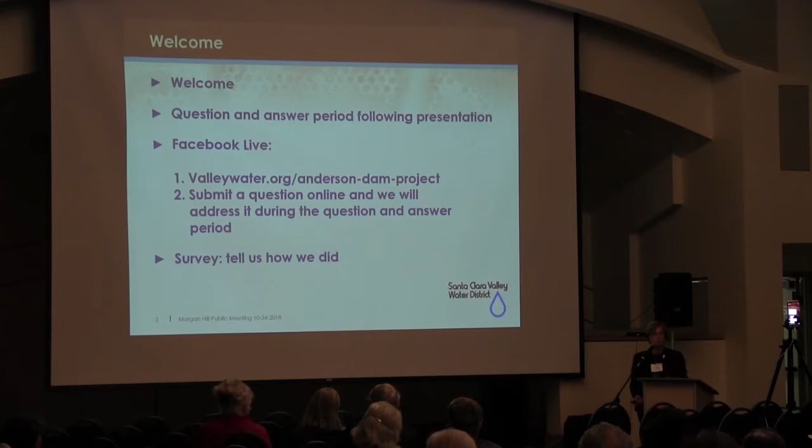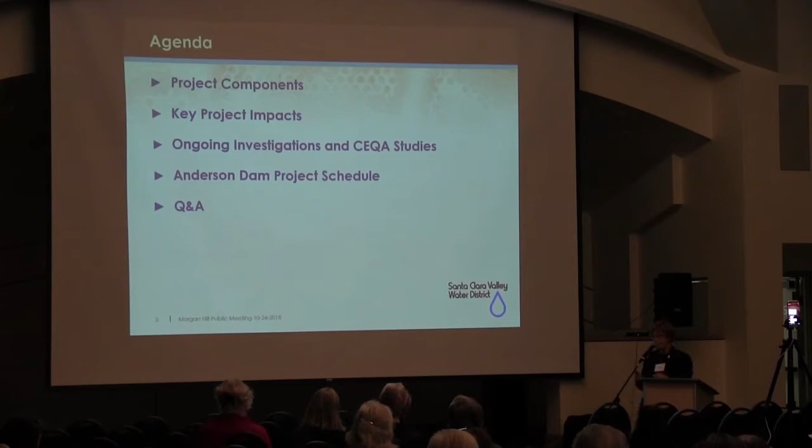With that, here's our agenda. We're going to briefly talk about the project components, spend some time on the project impacts, talk about what we're doing in terms of investigations. We're still doing a lot of data collection out there, and then briefly talk about the project schedule before we go into the Q&A. So I'll begin briefly with project components, which I'll actually hand over to Hemant Desai to go, but I have to do the first slide.

This is just an aerial view of the existing dam and Anderson Reservoir. The dam embankment is what you see looking from Morgan Hill. The spillway is up to the upper left. We have an outlet pipe about 5 feet in diameter that runs directly below the entire dam and discharges to Coyote Creek. The dam crest is that road that people can currently drive or walk across. And then, of course, our parking lot up there next to the Anderson Lake Recreation Area.

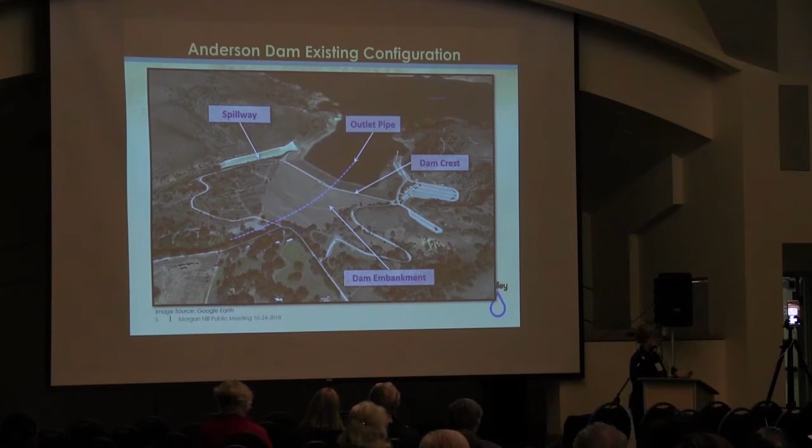The project was conceived because studies around 2008 found that the existing embankment, the existing dam, has a foundation with a potential for liquefaction. Thereafterwards, through investigation, we also found that there are a number of faults which basically crisscross the site, and they can have some adverse impact on the dam itself.

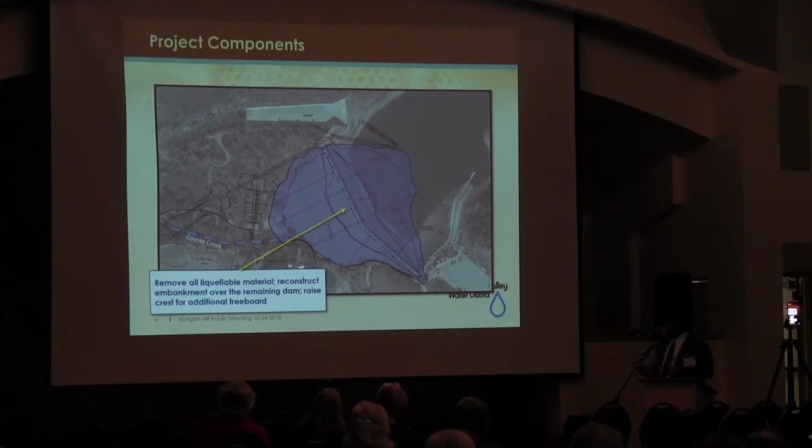So in order to address that, what we are planning to do is basically remove most of the existing embankment, remove the liquefiable soil which is the foundation of the dam, and then replace this with a better, stronger dam which can resist maximum credible earthquakes. What you see in blue is the footprint of the retrofit, which is basically removing most of the dam and then rebuilding it.

In addition, if you remember in 2017 when there were problems with Oroville spillway, the governor issued an order asking all dam owners to reevaluate their spillways. So the district reevaluated the spillway, and found that even though in its current configuration the spillway is safe, it needs to be brought up to new standards. So this project will be addressing that, replacing most of the spillway and bringing it to current standards.

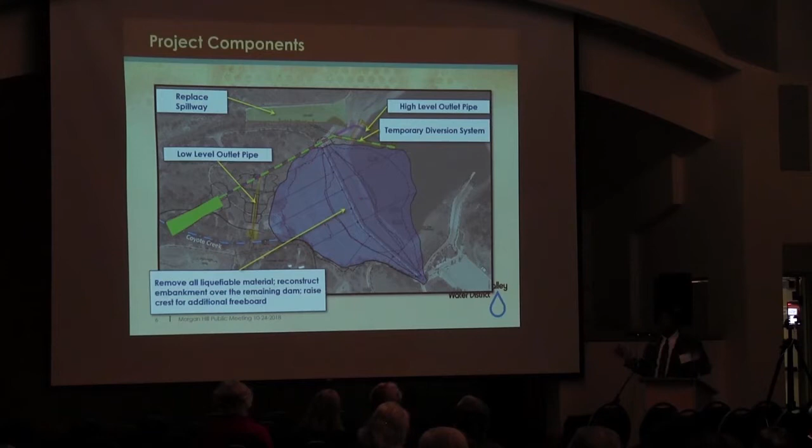What you see in the dashed orange, purple, and green is the diversion structure, and I'll brief you more on its importance when I go through the construction sequence. It is basically there for construction, to keep the reservoir drained through the 2 years of construction.

So here's the construction sequence. The construction is planned for 5 years, out of which 2 years, year 3 and year 4, we plan to keep the reservoir drained so that we can construct the retrofitted embankment. In year 1 and year 2, we will build the diversion structure, as shown right here.

At the end of year 3, in spring, we will have the dam with a diversion structure and we'll start dewatering the reservoir. The dam here is at elevation 647, the current elevation. In year 3, during summer, we will excavate the existing embankment to this configuration and bring it down to an elevation of 570, lower than 647.

We'll winterize it over winter of year 3, and then in summer of year 4, April to June, we'll come and excavate it all the way up to the core, which is what we'll leave in place from the existing dam, then rebuild it that same year by October to 570. The importance of 570 is that it gives us the protection we need, 1 in 2,000, during the 2 winters where we keep the reservoir completely drained but have a lower dam.

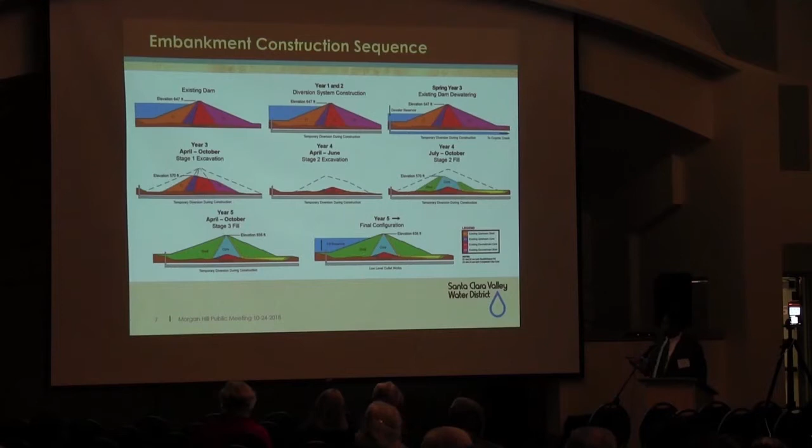Then in year 5, we'll come in summer and build it back to 656 elevation, and allow it to fill in year 5. So that's the construction sequence.

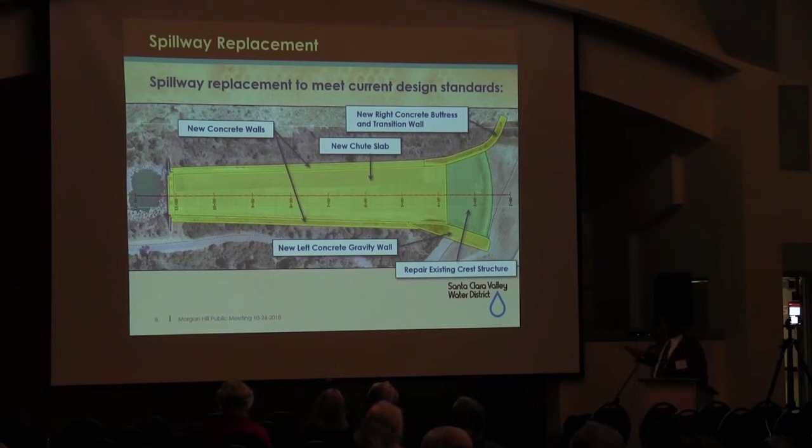I spoke about the Oroville incident and what it led to. Basically we'll be replacing the spillway walls, the chute. There'll be a new chute provided with proper under-drainage anchors so that we don't get anything like Oroville. What will be left in place is this green part.

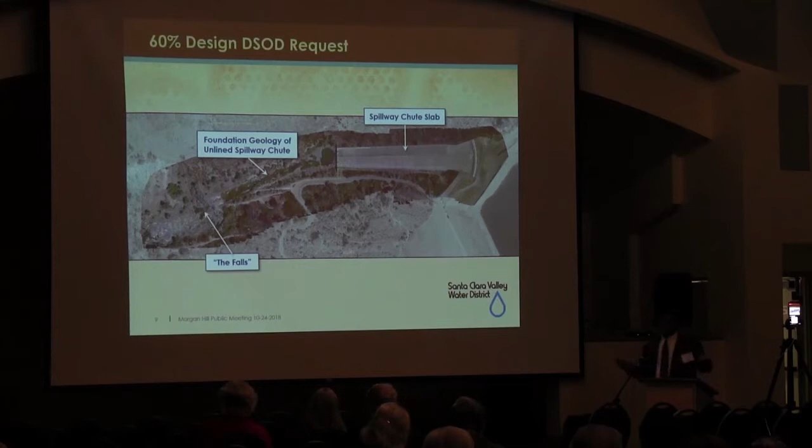We continue to evaluate the spillway. This is the existing concrete spillway, and thereafter there is an unlined portion of the spillway which the district is still evaluating. DSOD at the 60% design asked us to do some more studies here, mostly related to the foundation geology. They want to be sure that the unlined portion of the spillway is on competent rock. So that's what we'll be evaluating this winter.

As Simone pointed out, one of the things we're going to be doing is that the outlet structures are much larger than the current one, which now can release about 450 cubic feet per second of water, CFS. The issue is that as this outlet gets bigger, because DSOD has required that the reservoir be able to be dewatered in a relatively short period of time in case of an emergency, the amount of water being released now is considerably greater.

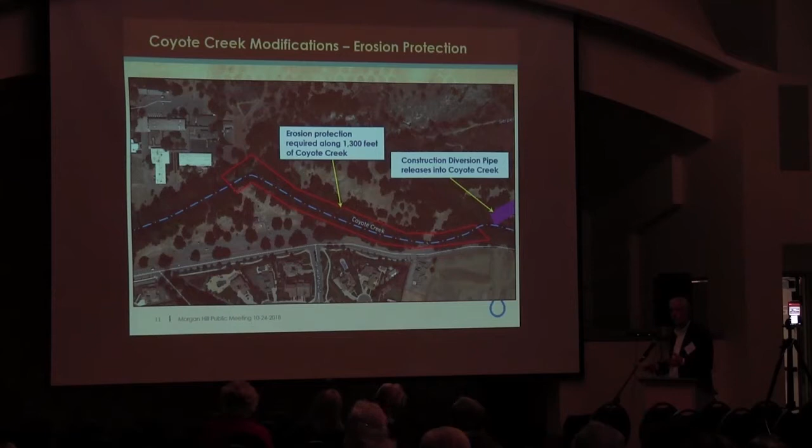So one of the things being looked at by the design team is how the creek has a certain amount of erosiveness, and there are some issues with that from a flooding perspective and the amount of the walls being washed away, such that it will need to be armored if we stuck with this design.

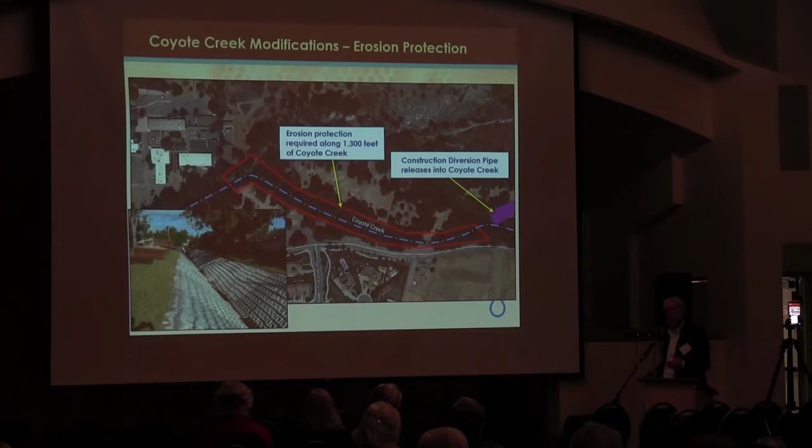As part of that work, we're looking at alternatives to this, and we don't know just yet exactly what those might be, but some could result in reopening the channel where the spillway comes out, what we call the north channel, and putting more water in that, leaving this to take the current level of water it can take, which is 450 CFS. We don't know if that's feasible yet, but it's being evaluated so we can lessen the level of effects we're having on the ecosystem.

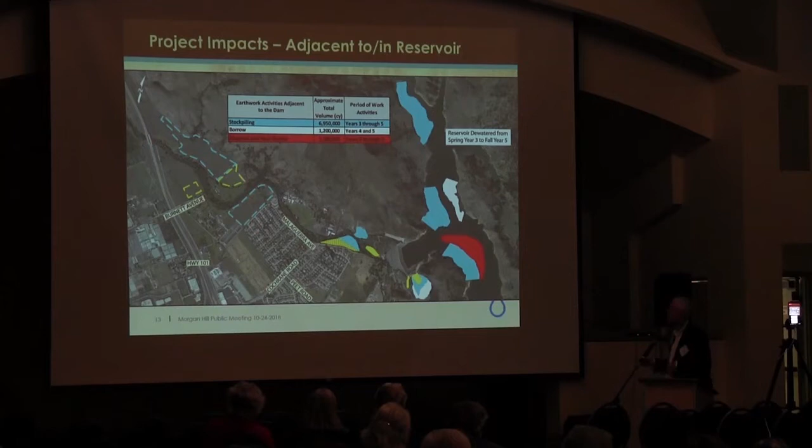To give you an idea, there's over 9 million cubic yards of material being moved in the dam itself, from the dam in these areas. That's a fair amount of material, and most of that is in the reservoir, so the purpose of that is to minimize air quality, noise, and traffic impacts within the neighborhood. The imported materials I talked about are only about 250,000 cubic yards, which represents less than 3% of the amount of material being moved around in the reservoir. That goes to show you that's a relatively small amount.

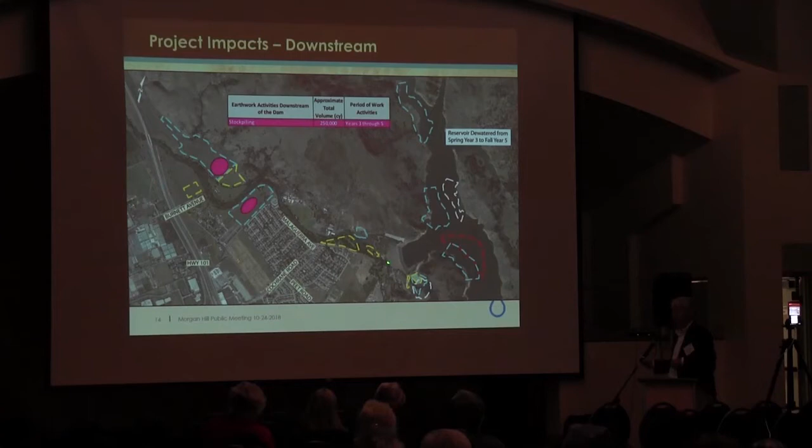There's an equal amount of filter material that will be brought in directly to the dam, and we'll show you those travel routes in a second.

This represents how the imported materials will be brought in off of 101 down Monterey Highway and on Burnett Avenue, and then stockpiled on the site.

Then an equal amount of material, another 250,000 cubic yards of this filter material, will be brought in off of 101 via Cochrane Road, directly to the embankment. So those are the two areas of travel for this imported material.

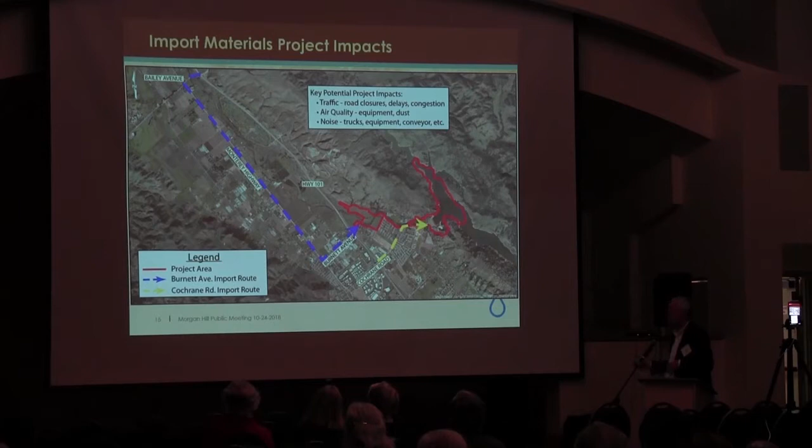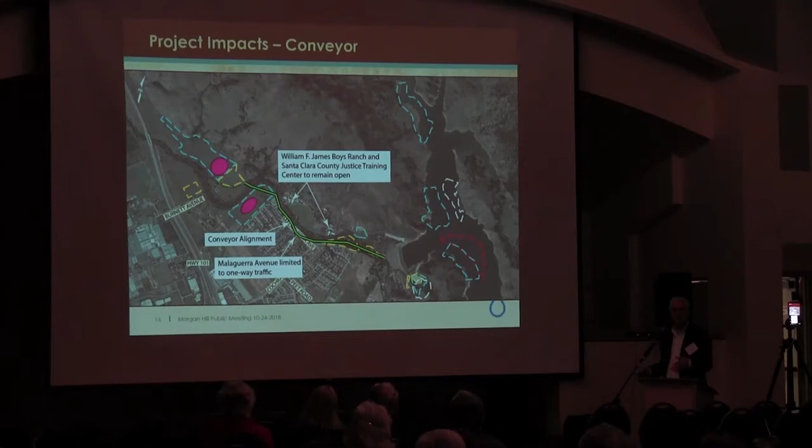We also are building a conveyor system, trying to minimize truck traffic by the neighborhood. The conveyor system will run along Malaguerra, taking about half of the lane, and that will be used for moving materials from these stockpile areas over to the embankment. Again, this isn't the most efficient way to move dirt, but it's one of the ways we've come up with to minimize the effects on the neighborhoods.

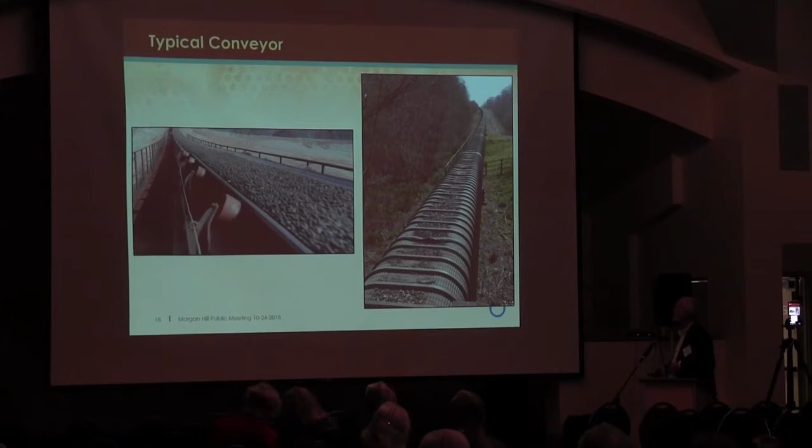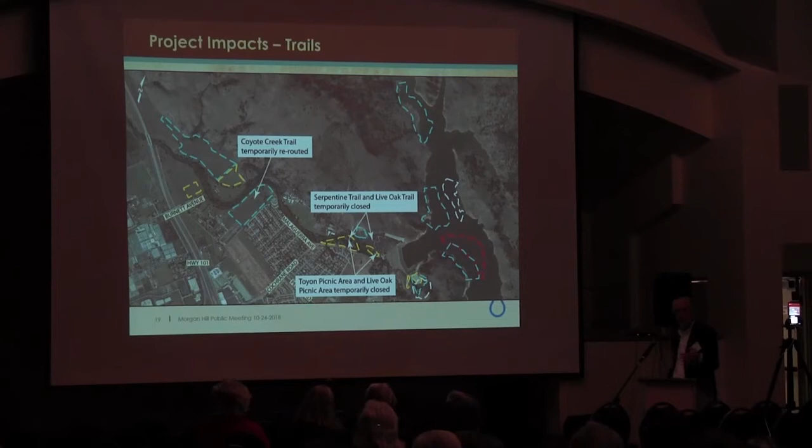This work will also affect some of the recreational activities around the reservoir because, from a safety perspective, they'll have to be closed. The Toyon Picnic and Live Oak Picnic areas will be closed. The Serpentine Trail and Live Oak Trails will be temporarily closed during construction, and the Coyote Creek Trail will be temporarily rerouted, because we have to keep people away from the construction traffic. It's a safety issue.

During the entire 5 years of construction, this portion of Cochrane Road will be closed. Local traffic can get through, but it's generally going to be closed to non-local traffic during the 5 years of construction.

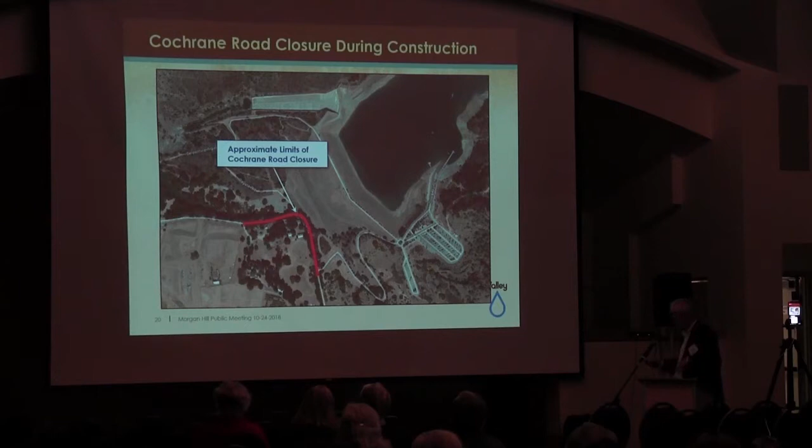The current road that goes across the dam and down the other side is going to be permanently closed, while pedestrian traffic will be allowed to walk on it once constructed and reopened. You will no longer be able to drive over the dam and down.

The way it's being solved is the road up to the parking area is going to be 2 lanes now, so the traffic will come in and out of that entrance area. This portion of Cochrane Road will be removed, and there will be some rerouting, to be determined, of pedestrian traffic down and around over here somewhere. We'll also expand the parking lot beyond what it currently is.

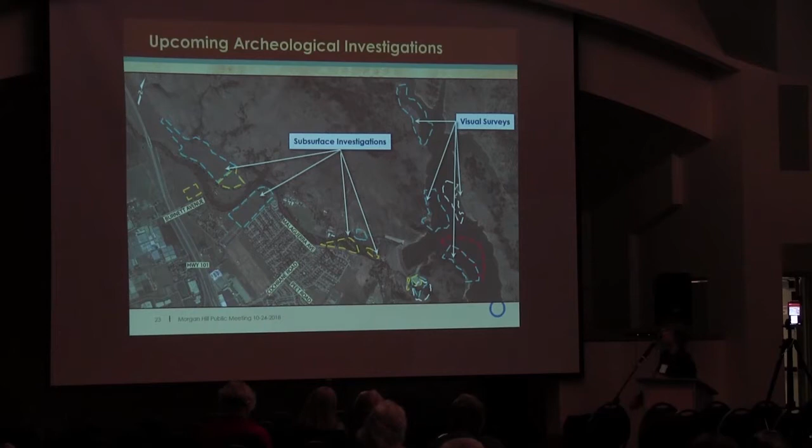And despite the fact that we've done almost four years of geotechnical and geological investigations, when we submitted the 60% design, the stages of design of a project are usually 30, 60, 90%, and then final. At each of those stages, our regulators, the Division of Safety of Dams, and the Federal Energy Regulatory Commission have to review those plans, comment on them, and provide us with direction or requests for more information.

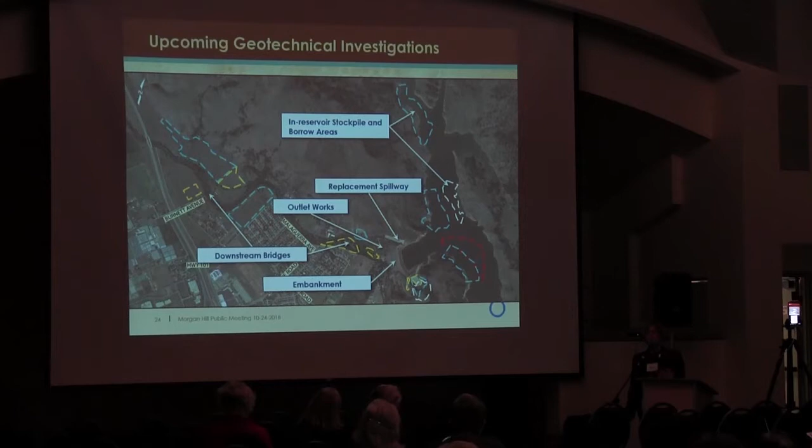So right now, we are in the process of looking at more geotechnical investigations for the new outlet works, a few more on the embankment, downstream bridges, the replacement of the spillway. We want to find out what is that geology underneath the existing spillway, and then also make sure that the stockpile areas and the borrow areas are going to withstand the activities that will be taking place.

Also, because fish habitat is a very important feature of Coyote Creek, and because National Marine Fisheries Service and U.S. Fish and Wildlife are going to be very keen on our impacts to fisheries, we are going to be doing fish assessments, habitat assessments, and also, let me move to the landslides in a minute, but we're going to be doing some surveys of creeks that flow into Anderson Reservoir.

Also one of the major creeks, Upper Coyote Creek, that flows into Coyote, and then the downstream portions of Coyote Creek below the dam. We have to collect habitat area as well as fishery studies and the like.

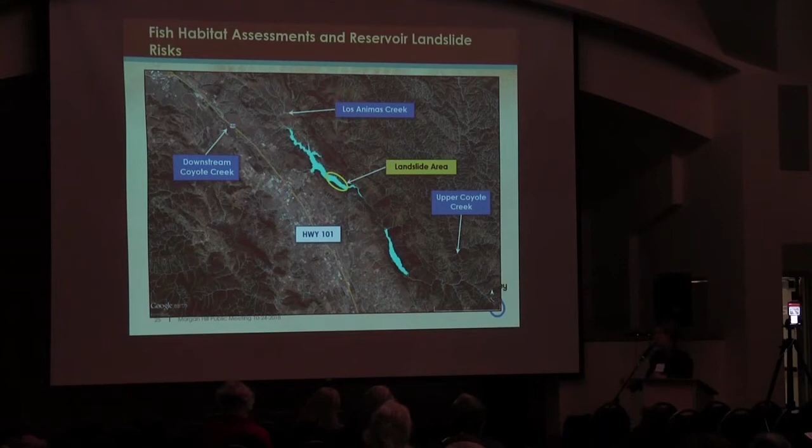And then also, on both the east and the west ends of Anderson Reservoir, on its southern end, there is a potential for landslides to occur. They have occurred ever since the reservoir was built. There are areas of unstable soil, and the complete drawdown of the reservoir may have some impacts in that area. So we will be doing pre-construction surveys and then also monitoring the areas carefully during construction.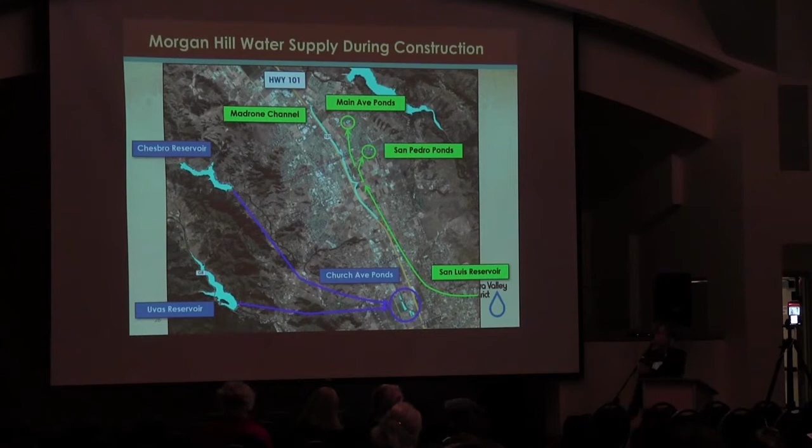So when Anderson is dewatered, Church Avenue ponds will be fed, as they are now, by Chesbro and Uvas reservoirs. The ponds and the Madrone Channel in the north will get their water supply from the San Luis Reservoir, over on the Pacheco Pass, Highway 152. We have a large pipe that comes in through the Pacheco tunnel, runs up along 101, and that will provide imported water to maintain groundwater recharge for those years.

So here is our current schedule for the project. It's moved a little bit, primarily because of the outcome of the 60% design. We received requests from DSOD and from FERC in July of this year asking us to investigate this further and provide more data. So we are continuing with design, and we'll probably be done by 2020.

Our CEQA process, the Environmental Impact Report, has moved slightly. We had originally anticipated releasing the draft EIR this fall, but we'll probably come out with that in June or July of next year. The key reason is that this additional data we're collecting now has to be incorporated into the draft environmental impact report. Otherwise it will be considered unfinished, and it's better to put it all together now rather than be delayed and have to rewrite it later.

With the final EIR in early 2020, then the National Environmental Policy Act, known as NEPA, we have to do a federal document as well, which will somewhat follow and lag behind the CEQA work. And then, of course, the permitting—we're engaging with the regulatory agencies now, but they will also want to read the environmental documents we prepare, and we'll only be able to finalize those permit agreements after the final EIR is certified. So, again, I'll leave the caveat that we're planning to get the permits by 2021, but there's no guarantee of that. That's a process we can do our best to manage, but we cannot control.

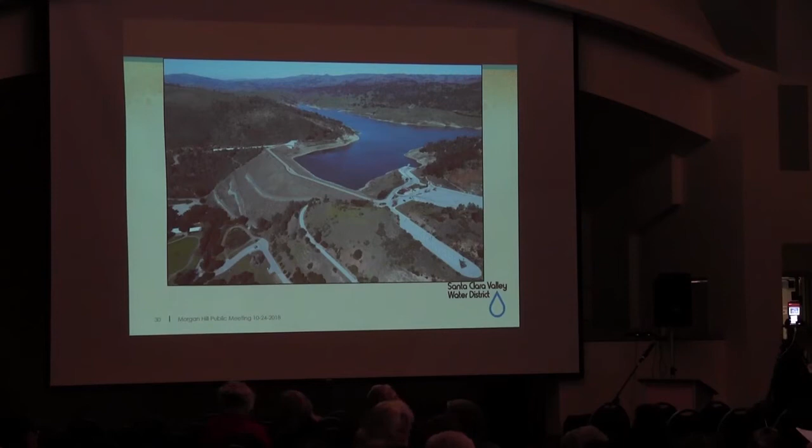I'm unit manager of our water resources policy and planning unit. We've been working on the project planning since last year. We initially looked at doing any kind of fast action we could take to reduce the risk of flooding for the community and the urban area. We were able to do one project in the Rock Springs community to reduce the risk of flooding there, and also started looking at the entire flood problem in the urbanized area.

So that project is going on. We'll be going through the planning process and developing alternatives over the next year. First order of business is defining the problem and getting back to the community. We're preparing for a public meeting around December or perhaps January, depending on the holiday timeline, to come back to the community and let you know what the plan is over the short term and long term.

At the same time, we're also starting the Corps of Engineers feasibility study. The Corps has not been interested in studying the problem themselves, but we will do the study with their assistance and pay for it, so that we can potentially develop some federal funding for the flood protection project, if that works. So it'll be a two-track planning study, district planning and Corps of Engineers planning.

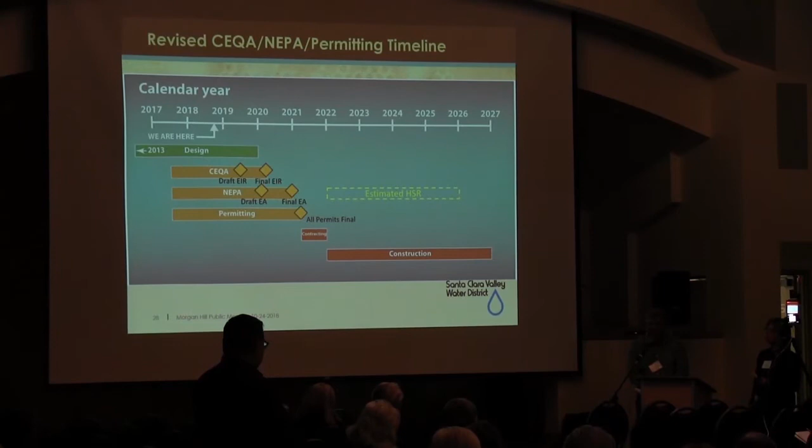In terms of the specific flood protection project, as I described, we're in the planning phase. We're going to be coming to the community soon with our initial concepts of what we have in mind for the flood protection project. That's over the next 2 or 3 months. But Catherine's going to address the reservoir.

So in response to your question, when are we going to get a pump system in place? Part of this construction, as we explained, one of the project components is to build a new outlet pipe, not one that goes under the dam, but around it. If you're looking downstream, it's going to go through the right abutment, through the hill right there, and then come out in Coyote Creek. That pipe will be bigger than the pipe currently in place. So the district will have the capability of releasing more water to the creek in the event of back-to-back storms.

If you recall, in 2017, we opened up our outlet pipe very, very early in January. When the first big rainstorm came, the first weekend of January, that Monday, we made a decision to open that pipe to start releasing 425 cubic feet per second. That pipe remained open all the way through, actually until almost mid-April, so that we could drain the reservoir to the best extent possible. As it turned out, it wasn't enough, right? And that has happened a number of times in the last 70 years that the dam has been there.

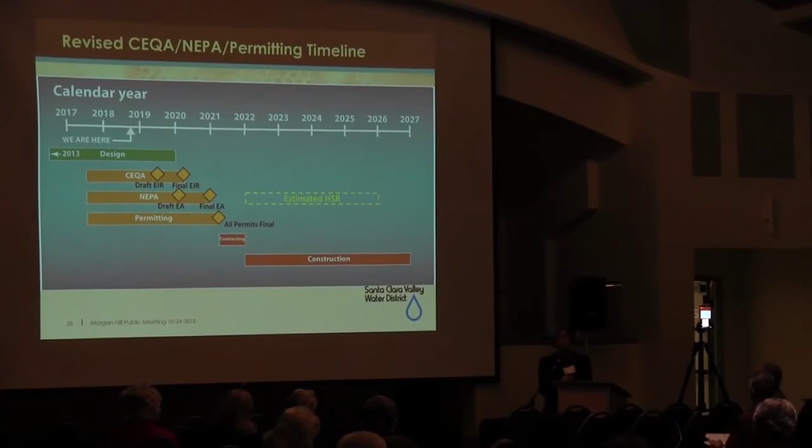So last winter, staff did have a discussion with the board of directors about potentially lowering the reservoir even lower than what we would normally do at the beginning of the winter season, primarily for the purpose of staying below that seismic restriction. Back in 2017, when it rained so hard, we did exceed that seismic restriction, and that caused a lot of anxiety in many communities, no question about that. So the board decided to lower the reservoir even further last December so as to make sure that even if it rained a lot, we would be a lot closer to that seismic restriction. We can only keep it about 55% full at all times, 55% or below.

So we lowered it even farther in case it rained. Well, it was a fairly, we would say, barely normal to dry winter in this area, and the reservoir never really gained a lot of volume.

In fact, in the spring, we had to take water from San Luis Reservoir and add it to Anderson so we would have enough of a cold water pool to release down Coyote Creek through the summer months to support the fish habitat that's there all the way down to the bay. So we had to actually supplement the amount that had run off from the watershed from the storms.

November 20th, next month, is going to be another board meeting, and during that meeting staff will be presenting a winter preparedness program for the board to understand what measures we're taking. There will be a discussion with the board about whether to lower the reservoir to the same extent as last year in advance of the winter rains. So that is going to be debated. It might be the same level as last year, or it may be different. That's going to be a staff discussion with the board.

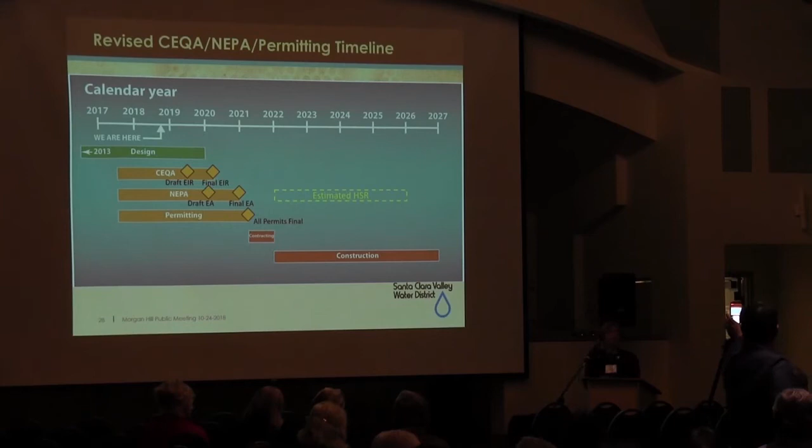Okay, I have a question here. As you mentioned, there have been many floods over the last several decades, and after each flood there have been promises made that we're going to fix it, and it hasn't been fixed. Why should we have confidence now that this is going to work? Secondly, how are we going to pay for this? I haven't heard anything about that, and that's always been a problem in the past. And third, when the dam is down and we get heavy rains, as we're likely to, is that going to mean greater threat of flood or less threat of flood?

Those are excellent questions. The board is constantly asking those same questions as you are. Listen, what I said earlier, we're all about flood protection. We're doing the best we can. I'm not going to give you any better hyperbole and say we're on it. We're doing the best we can to find the funding mechanisms, to get the federal government to release funding, to get the permitting process moving.

No, we want a long-term fix. We want a solution, not just for the 25-year, 50-year, or 100-year flood, but there are also projections for the 500-year flood. So we're looking out and acting as visionaries, asking what do we need to do, how do we access the resources to do this. Do we put it all on the ratepayers? Do the federal government involve themselves with the resources they have? So we're all in it together. I'm just sharing that with you. We're in this fight with you to win.

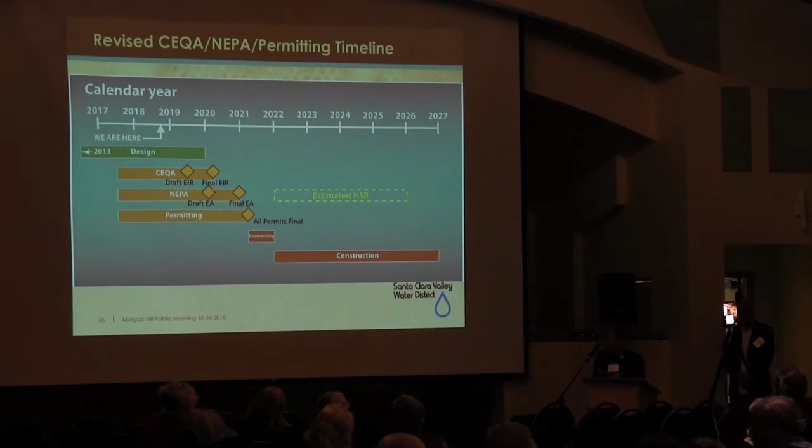And we didn't show the rerouting, let me see if I can quickly bring that up. Down at the end of Malaguerra, where you've got your access to the Coyote Creek Trail, we're going to reroute that so people can use it throughout the project construction. It'll be rerouted so it's safe from the activity around those stockpile areas.

Question over here from this gentleman. Yeah, if you could go back to your schedule chart, I have a couple of questions on that.

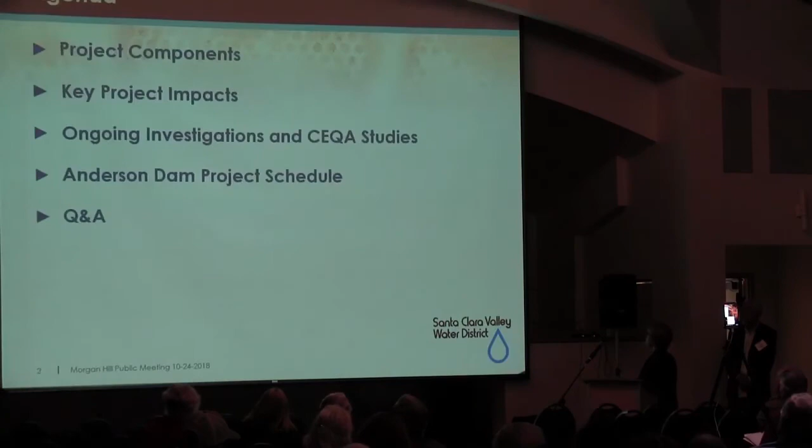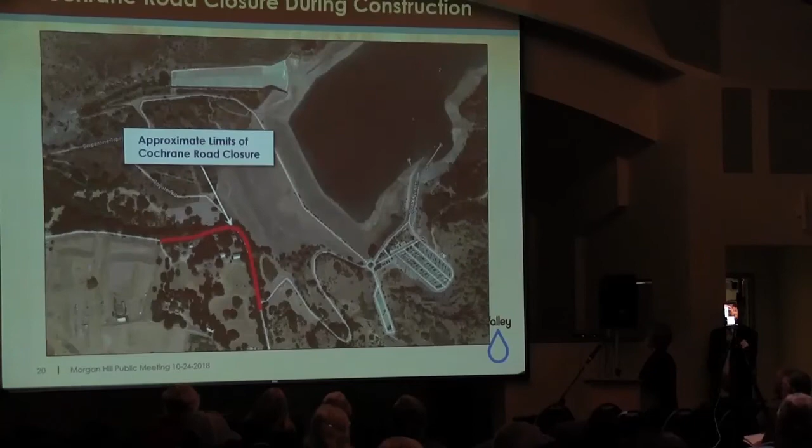You show on that chart that for NEPA, you're only preparing an environmental assessment rather than an environmental impact statement. What guarantee do you have that you won't have to prepare a NEPA environmental impact statement that will add years to your schedule before you even think of constructing?

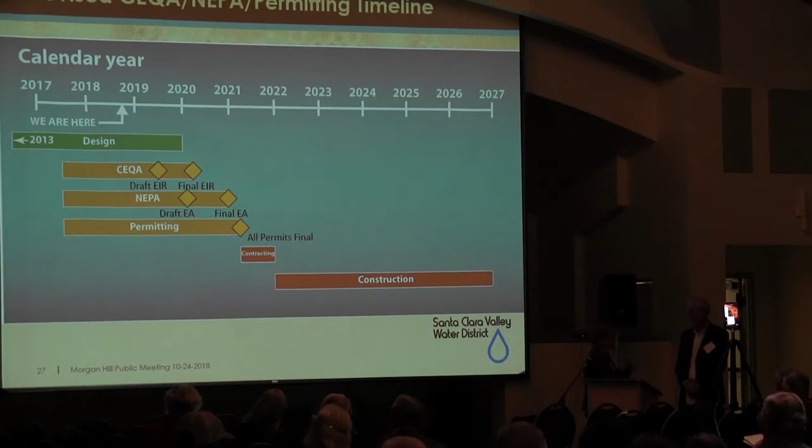It's a good question. We have two federal agencies working on this project in that regard, FERC D2SI and the U.S. Army Corps of Engineers, and FERC D2SI is taking the federal lead. From their experience, they believe an EA is adequate for this situation. To highlight that, the Calaveras Reservoir dam retrofit project did an EA, and that was considered appropriate and suitable. So while there's no guarantee, we do have some expectation based on past and current understanding from federal regulators that an EA is appropriate in this case.

I hope you're right, because we've worked on numerous projects where an environmental assessment would have been more than adequate, but we were still forced to do an EIS. So I hope you're right.

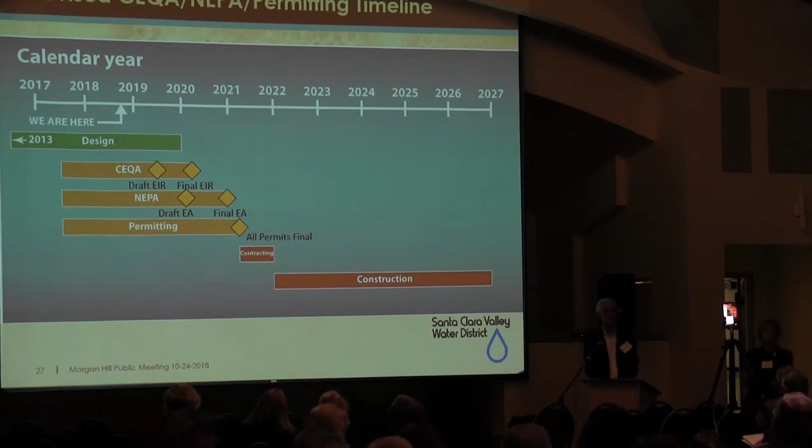The second question relates to high-speed rail, which used to be on this slide but has mysteriously disappeared. High-speed rail does not have an alignment yet—they're still trying to figure out their preferred alignment and how it would be built. Regardless, it seems there will be significant cumulative impacts between your project and the high-speed rail project along Monterey Road north of Morgan Hill, because of their construction activity and traffic, combined with the traffic you've shown coming down and over Burnett to your project site.

Well, that's why we posed the question to the High-Speed Rail Authority. They gave us information on their expectation for doing construction within the Santa Clara Valley, and that will be one of the key things we look at as one of the reasonably foreseeable projects for a cumulative analysis. So yes, you're right, that will be analyzed.

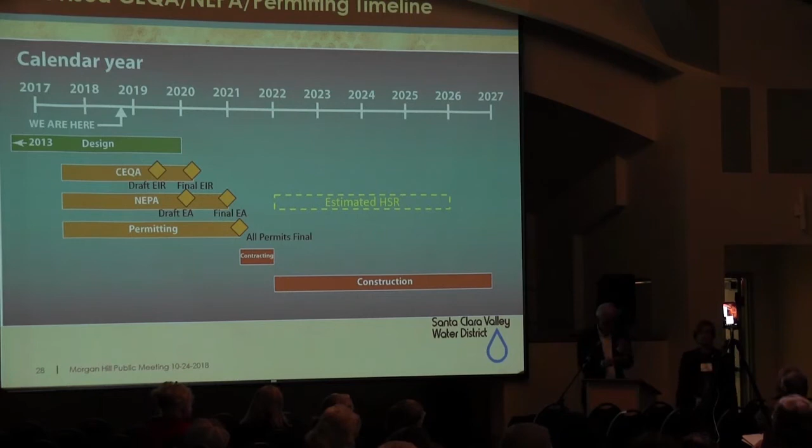Okay, I have a question back here. Let me answer one of these Facebook questions: will the lake reopen for recreational use prior to draining the lake?

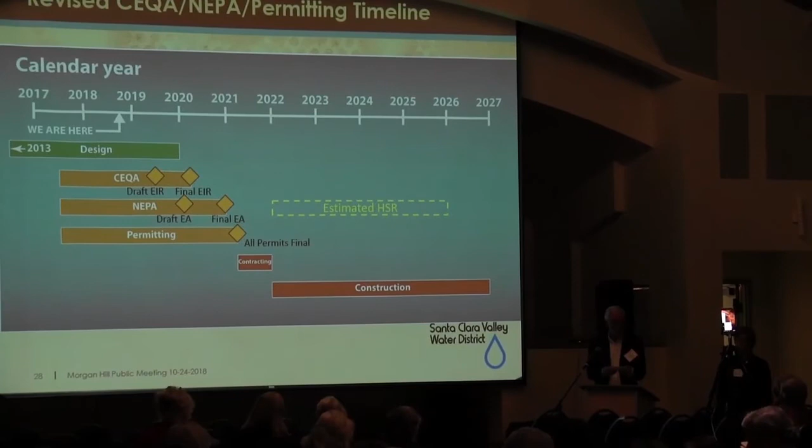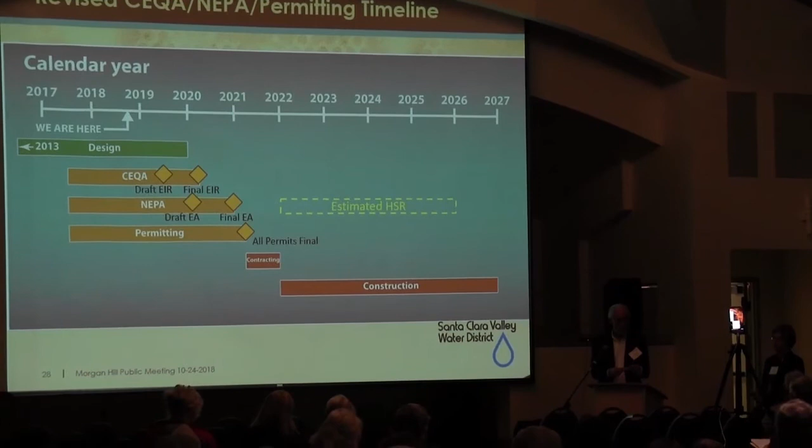There are two ways to look at that question: between now and when construction starts, which is really dependent upon how the board chooses to manage the reservoir levels. The second part is once we start drilling for the diversion structure—no, the lake will be closed for all recreational use at that point. So it depends on how you interpret the question. That's how we answer it.

So potentially 10 years if we close? Well, I can't speak to between now and when construction begins, but I can speak to when construction starts: recreational use will not be occurring in the reservoir during that 5 years, yes. Between now and then, it's dependent upon how the board wants to manage things, and Mother Nature.

There's another question, which I'll try to paraphrase, about potential landslides and how that may affect neighborhoods, given some indication there's already been some movement with the reservoir at a lower level over the last several years. As indicated, there's a monitoring program that will go into place during construction and reservoir dewatering, monitoring around the reservoir to see where there are movements. During construction, when those landslides are detected, there'll certainly be a strategy to go in and fix them where appropriate.

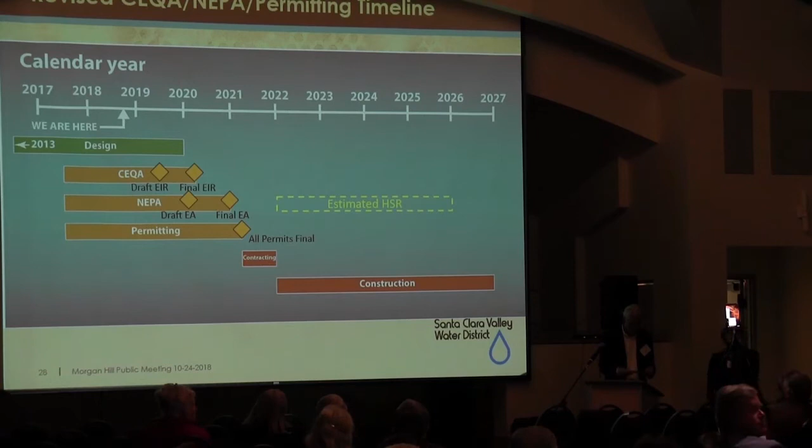So, okay, any other questions? We'll go right back here. Thank you. My name is Doug Mayer, I live in Morgan Hill. My question is, how much reservoir capacity are we giving up because you're going to use it as a site for disposal of material as well?

It's a good question, and certainly others have asked that. It turns out to be an extremely small percentage of the reservoir bottom. What you're seeing there is just a very small snapshot of the reservoir. We've calculated it to be just a couple percent of the reservoir bottom, and it's only going up a few feet, all told, because it's being compacted in. So there's almost no measurable change to reservoir capacity from that disposal.

Question over here. Yes, John Bailey. Okay, yes, good.

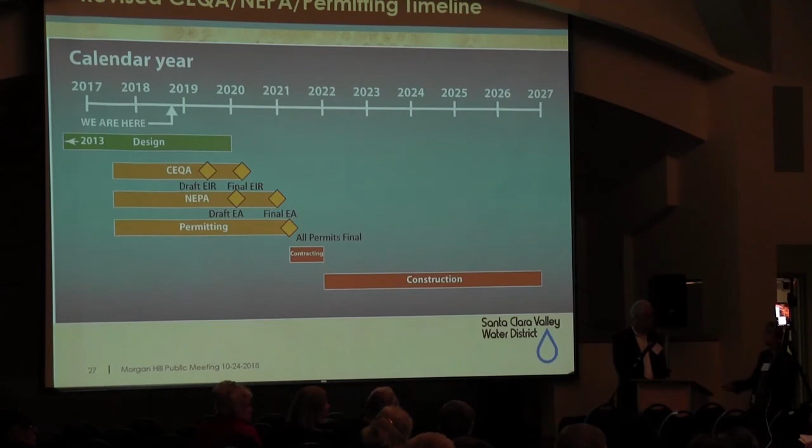Asking a domestic question about your plans. Are they yet in place to the extent that you know where the staging of equipment places will be? I ask because our house is opposite the staging areas for the Half Road project now, and that's like having a war zone all day, every day except weekends. It's really important to know this for the value of the property and everything else. Where will the staging areas be?

These two areas will be staging areas, and there may be a couple other small places as the plan is finalized and moves forward. We're trying to do those in ways that don't affect the neighborhood, but they also have to be in locations appropriate and suitable for the construction process. So we've got two competing ideas to try and optimize.

Tell me again what those areas are. I can't recognize them, pardon me? What roads are they? I don't understand this map too well. You pointed to two places, and I don't know where the roads are.

All right, so this is Highway 101. Burnett Avenue Bridge. The bridge that crosses the creek here was washed out about 20 years ago, so that bridge is not there. We're going to rebuild it as part of this project. But right now this is just a gravel-based parking area, so that's going to be one staging area.

And then Malaguerra Avenue ends at the ranger station, so we're going to also be using this area here. It's across the creek, so it's quite a distance away from any of these neighborhoods. But I do want to point out, this is another staging area here.

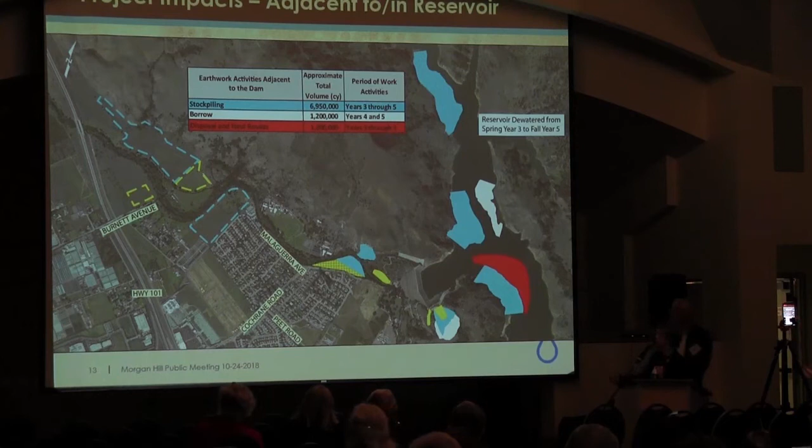This is Cochrane Road, coming off of 101 and then making that right turn and coming up to the dam embankment. So we'll be staging equipment here, over here too, and then the contractor will probably be parking equipment up at the parking lot area. So the staging areas closest to neighborhoods are right here on this approach up to Anderson Dam.

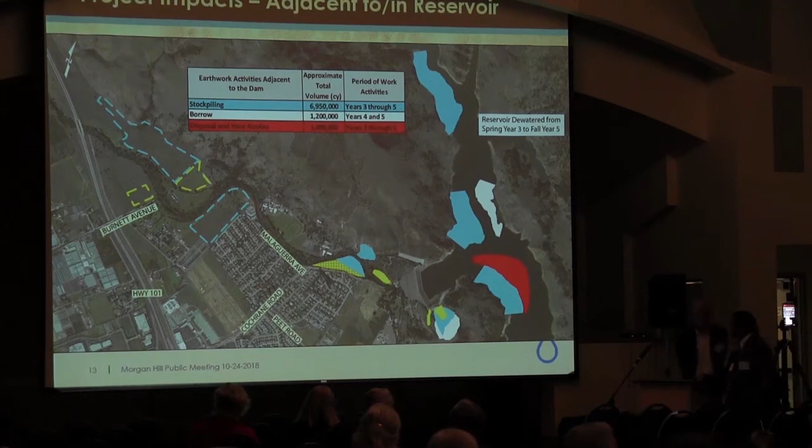We have a question over here. This conveyor that's going along Malaguerra, how large is that going to be? And if you're making Malaguerra one lane, will it be one lane in one direction? Because it would be impossible, I think, to make two-way traffic on that one existing lane that would be left.

Yeah, so a typical conveyor belt is about 6 feet, so it'll take about half a lane. There'll be one lane which will be open to traffic all the time. Our analysis shows that the area which will be most impacted will be the houses that basically front Malaguerra, and for that we will have traffic control for residents to be able to get to their houses.

Whenever the conveyor system is going to be operated, which is 2 to 3 years of the whole construction, we'll provide some sort of traffic control for residents to be able to access their homes.

Is it a very noisy operation? No, so just to give you an idea about the noise, a typical street produces about 75 to 80 decibels at about 300 feet. With dampers, which would mitigate the noise, the conveyor belts only produce about 50. And is it completely enclosed? That's right, so there'll be minimum spill of any material, and it will be maintained whenever it's operated.

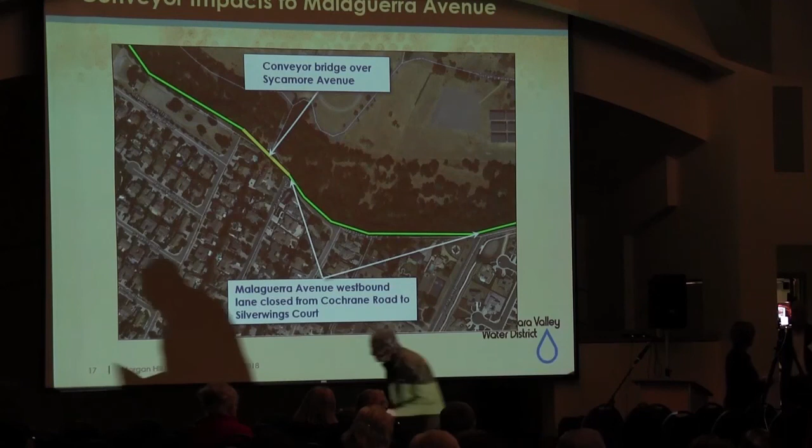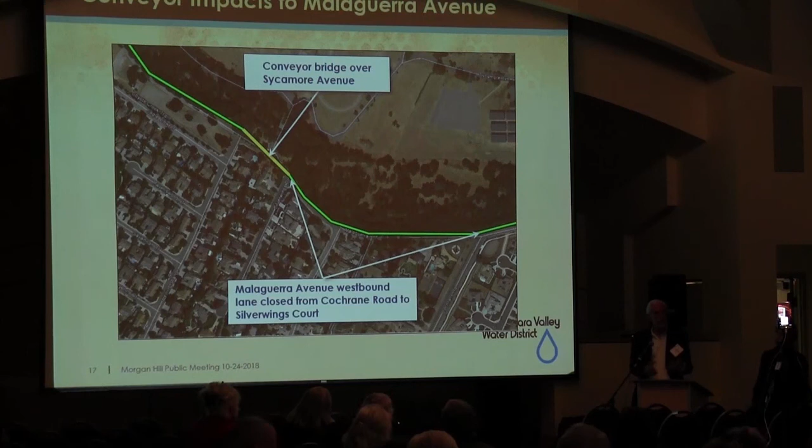Another good question. The amount of biomass that comes out of a reservoir from dewatering can be quite significant, and there's going to have to be a plan put into place to deal with it. In some cases, they'll have to find locations to bury it because it is quite significant. Before the reservoir is dewatered, all of this will be worked out, and part of that is going to be part of the permitting we have to get from the regulatory agencies as to how we deal with it. Exactly how that's going to look and how we manage that amount of biomass, we don't have all those details yet, but that's what's coming in the months ahead, how we're pulling that together.

Okay, we have a question here.

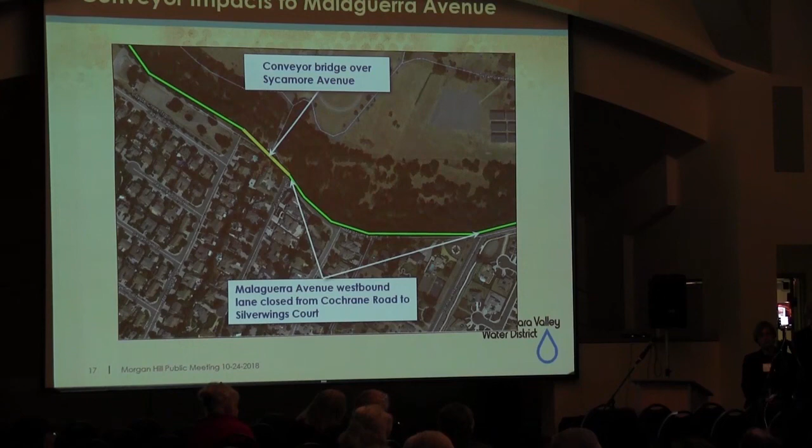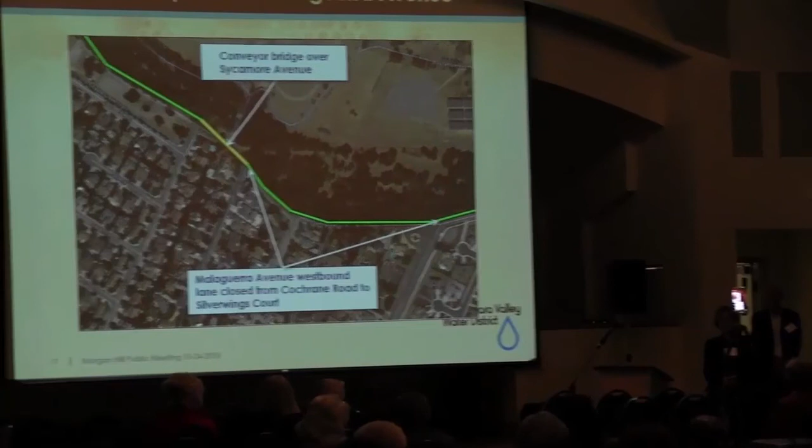Are you taking into consideration the sun's plus and minus effects on activity when you're taking all of the water into consideration? Because it goes through a 10-year cycle, plus or minus one year, and for the last 50, 60 years I have watched it. I've been in the floods in '45, '55, '65, '75, '84. The sun goes through a 10-year cycle, plus or minus one year, basically. From '84, we went into '95, '05. I thought we were going to have more rain in 2015, but it turned out to be the tail end of '16. Who knows what's going to happen. The sun right now is at solar minimum, we're coming out of solar minimum. So my question is, are you guys doing any kind of consideration with what the sun is going to do, and what it's done for the last 300 years?

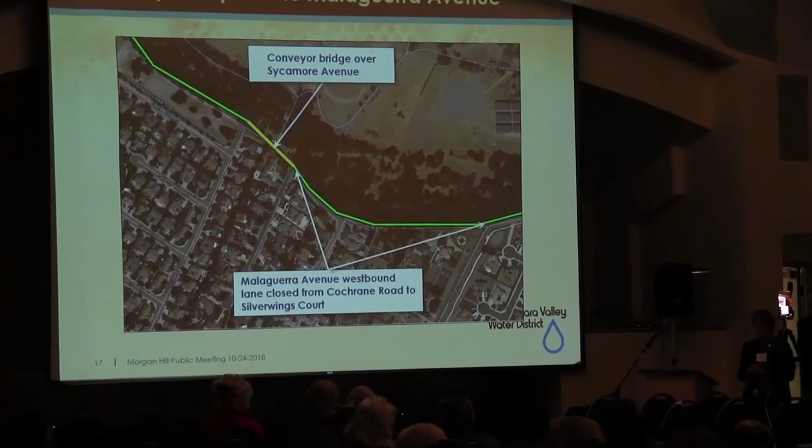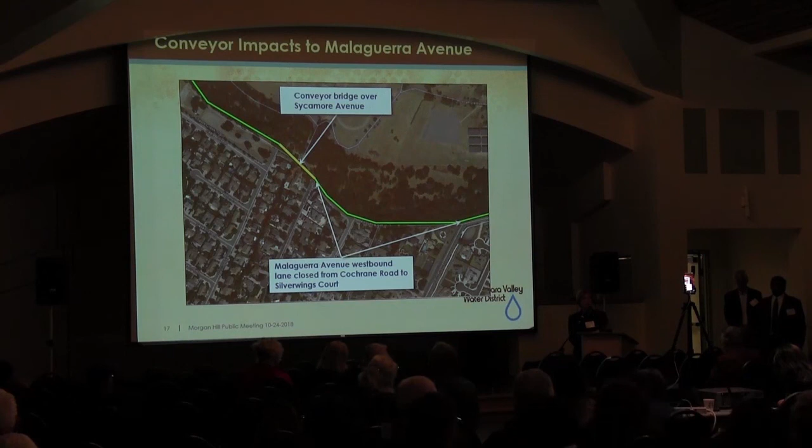That is a very good question. We don't follow solar flares or sun activity in terms of trying to forecast what kind of winters or how heavy rainfall is going to be. We tend to rely on NOAA and other weather services to provide that forecast. In fact, I believe tomorrow there is going to be a NOAA discussion with our board for a look ahead at what kind of winter is expected, based on weather patterns, the temperature of the oceans, where the jet stream is, and if that big blob is going to come back and sit over the Pacific and prevent storms from coming into California. So we're not weather forecasters, we rely on other agencies who study that and are probably much better at predicting things than we are.

I have one more question that came in via Facebook: where the road will be closed for 5 years, is it ever going to be widened so it is safe? So the question is about that bend around Cochrane Road as you come up to the base of the dam, is that going to be widened? We have no plans to widen it. It is a county road. We are likely going to have to repave it after all the truck traffic and heavy equipment traveling that road for 5 years. The county will ask us to repave it and restore it to good condition. We're prepared to do that, but whether the county has any plans to widen it, we haven't heard from them. We have been discussing this project with them, so that may be something that will still come, but it'll be up to the county to make that call and put together the design for that kind of widening.

Question over here. Yeah, this is amazing, everybody's wondering about the flow of the creek. My big question is, you've got a big earthquake fault line on the other side of Anderson. Has there been any studies on transverse shock waves? Or what will the dam take in a major earthquake?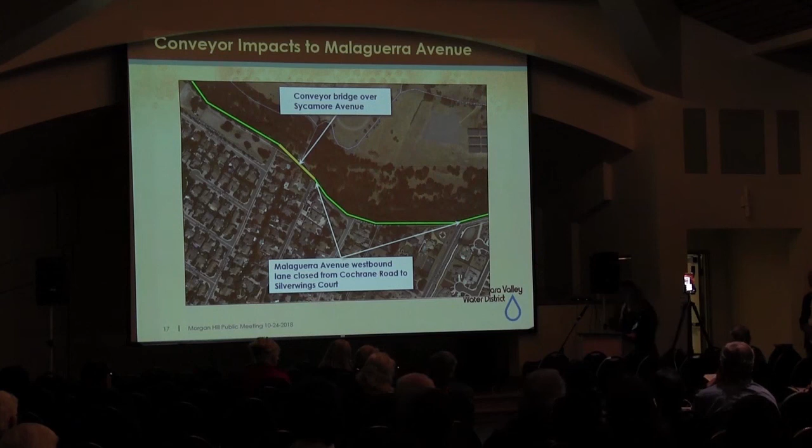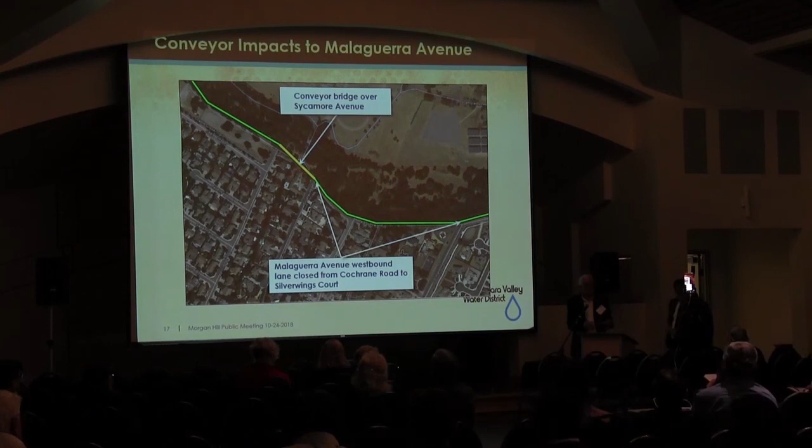Another question from Facebook: living at the base of the dam, what type of noise, vibration, and dust can we expect? That's still being studied because we're still doing calculations as to what would be a conservative estimate of the amount of trucks and things that move as we're finalizing the stockpile plan. As with any construction project, there will be a series of mitigations that will have to be evaluated and determined as to how they may lessen some of these things. But there will be noise, there will be vibration, and there will be dust. We will follow standard procedures to lessen the dust, do what we can to minimize the impact to the local neighborhoods. But again, we don't have the information just yet.

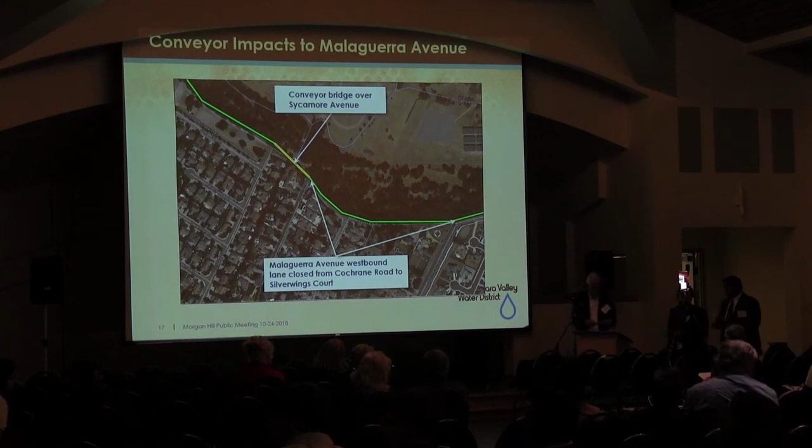Okay, the room is empty. I think it's a little after 8 o'clock, and we had promised to hold this meeting until 8.